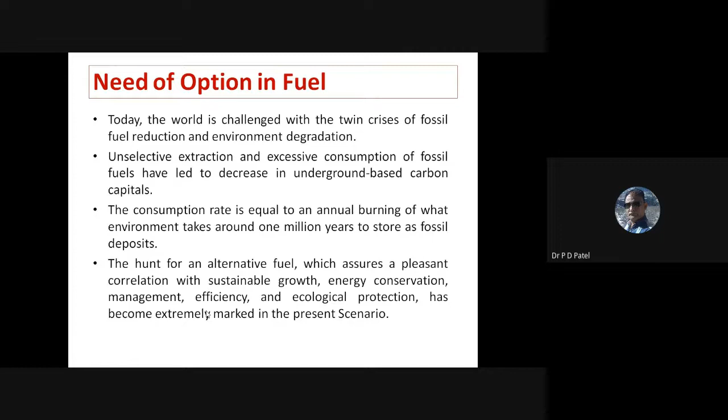This should not be too costly. I agree that alternative fuel always promotes better results in the exhaust, but it should not be too costly, which are not bearable for the general people. Now, this is the work going on with alternative fuel.

Generally, we have read the literature, and as Professor Tipse said yesterday, there is gaseous fuel and liquid fuel. These are the few fuels on which ample research work is going on. But even though that is a fact, it is true that we have not established the potentiality of alternative fuel in our transportation up to the mark.

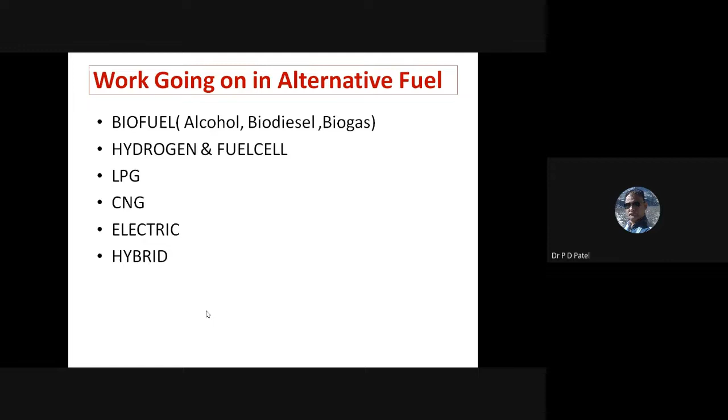In few areas, biodiesel has been used, but even though, we have not established the potentiality of alternative fuel in our country. We have used LPG, we have used CNG, it is well established, but electric vehicles, government has been promoting with some subsidies etc. But even though, we are not up to the mark where we can reduce emissions and environment pollution, and achieve a better performance in the engine.

Feasibility for the optional fuel. We are talking about the optional fuel, alternative fuel. So what are the feasibilities? Availability and renewability, emission effect on the environment and health, economy or cost, fuel characteristics, adaptability to the existing engine, safety, and infrastructure.

Why did I keep this part in our presentation? I feel that whenever you introduce any fuel, you are checking it as an optional fuel, whether it is a CI engine, SI engine, any internal combustion engine for transportation. So we have to assess and check the feasibility of all these parts first, and then we can use this fuel for the long run test. Otherwise, there may be some problems in the future.

For the short run test, there is no issue. I always say that the oil with which a lamp burns, an engine can also run on, but it doesn't mean that we should run an engine on that oil. We have to check all these parts, and then we can introduce this fuel as an optional fuel.

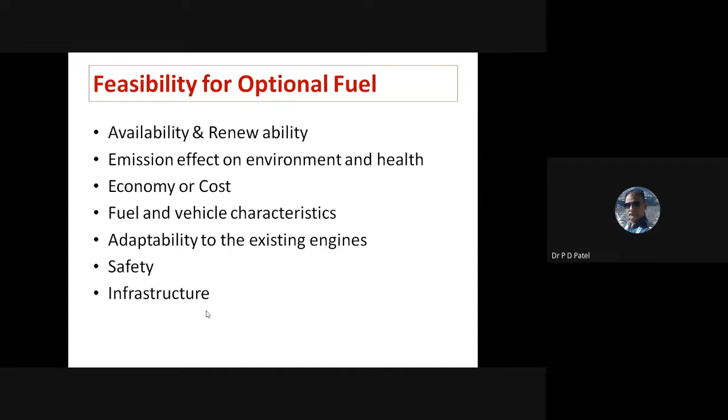So for that, till date, normally what we are measuring to establish the alternative fuel with fossil fuel is by observing the properties of the optional fuel, performance of the vehicle, and emissions of the vehicle. Most of the fuels are less damaging to the environment, as we are all aware. By using alternative fuels rather than fossil fuels, we get better results in emissions. But as far as performance is concerned, I have reviewed so many articles, and we are not achieving performance up to the mark. However, the technical feasibility is no longer questioned.

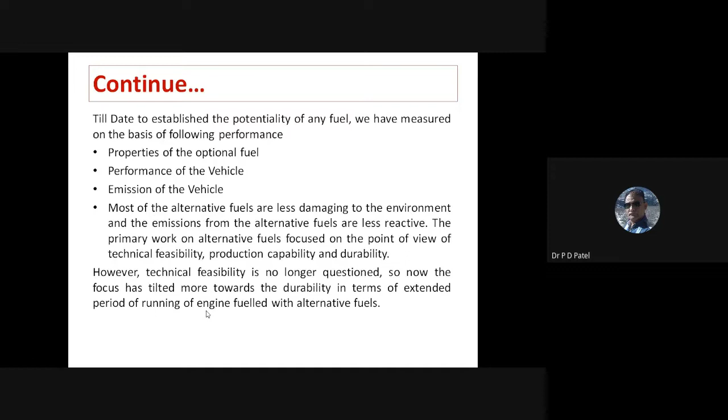But now the focus has tilted towards the durability test, to extend the period of running of the engine on alternative fuel. So we have to check the durability analysis to establish that fuel, any fuel. I'm not talking about biofuel specifically, or hydrogen fuel, or electric fuel. Whatever fuel you use, if you want to establish the potentiality of alternative fuel with fossil fuel, at least we have to check the durability test with that alternative fuel. For that, life cycle analysis is introduced.

Now, life cycle analysis, generally we call it LCA. Life cycle analysis means it is a long run test. We can say it is a long run test. Some reviewers call it an endurance test, a tribological analysis, a durability test. Any terminology you can use, but how the LCA has been carried out, how we can implement this life cycle analysis in our transportation sectors - if I say, it is basically a process-based analysis, an experiment-based analysis.

Now, process-based analysis: we have to examine the environmental aspects and product aspects at all stages throughout the life of the component, throughout the life of the system.

I'll give you the best example for process-based analysis. Normally most colleges participate in SAE Baja competition. This year my institute participated. We designed an all-terrain vehicle, manufactured it on our own campus, and participated in Indore at the event.

Next year, when we participate for the second time, we disassemble the whole all-terrain vehicle. Components which are still usable, we reuse. Those which require fine-tuning, we tune up. Those not in usable condition, we scrap. This is what process-based analysis means.

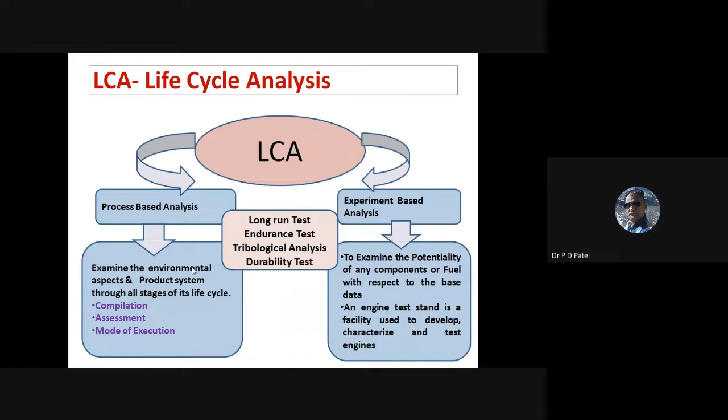Now, experiment-based analysis: we have to examine the potentiality of any component or fuel with respect to base data, with respect to the fossil fuel which we are using in IC engines. This engine test stand is a facility used to develop, characterize and test engines.

Going through the process further, the SAE Baja competition is just a basic example to understand what happens. We manufacture a component or product, distribute it, use it, and after the defined age based on performance or application, we scrap that equipment or vehicle. This is what we call end of life.

During that part, we determine which components can be used and which can be recycled. We disassemble it, the material goes through the manufacturing plant, and then it is used again for the product. This is the whole cycle we follow - the life cycle from the process point of view.

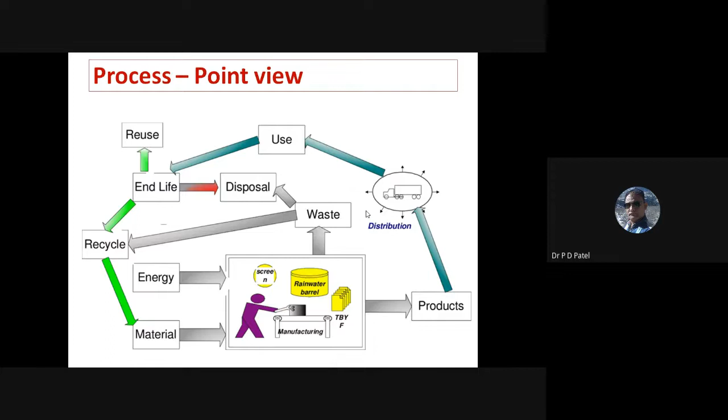As far as performance and experiment is concerned, we move with the experiment point of view. Friends, this is from my experience since 2011. I'm sharing today my whole experience of life cycle analysis during my research.

In the experimental point of view, for any engine used for transportation, we have to find out the performance analysis. Secondly, we check the impact of addition of oxygenated fuel. We also check whether any engine parameter influences performance and emission. This is all one part of this.

Ample work has been done in this portion. I've seen so many articles - if I search on biodiesel in Science Direct or elsewhere, I'll get hundreds of papers. But the fact is, we have not established biodiesel in a full-fledged way in our country. So there is some problem, and we have to find out why we are lagging.

If I move to life cycle durability analysis, there are two components which have to be checked: the rate of wear that occurs in the engine components, and the impact of the lubricating oil. This can be done through qualitative analysis and quantitative analysis.

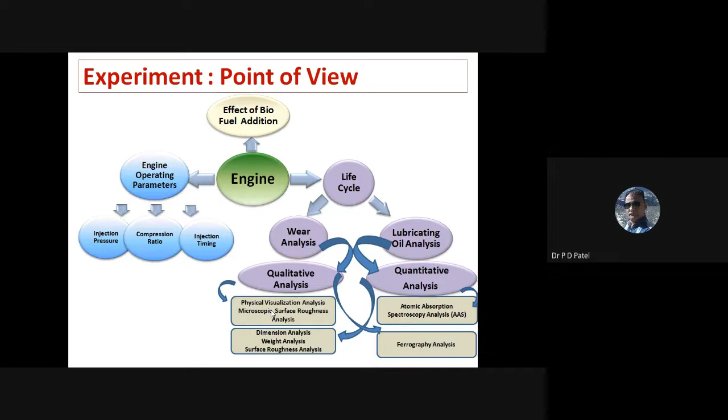But it's not always possible that I'll get better results. If someone changes the oil, he may get better results compared with this experiment.

From the experiment point of view, if you see the background, the Pollution Control Board suggests that if I talk about the effect of emissions only from the transportation sector, 80% emission is emitted in the environment by road transportation. Very few, 13, 7 and 1 percent, is by rail, sea and air. So now we have to think how we can reduce this emission in the environment caused by road transportation.

So what do we have to think about? If you see vehicular pollution control, a question occurs in my mind: what have we done till date, what actions? Government has some regulations and policies to establish biofuel as an alternative fuel. The fact is, again, we have not established biodiesel with the main fuel. There is a lot of work done, no doubt, friends, but we have not established this fuel with the mainstream. What have we achieved till date?

So there is a lot of work going on to establish this optional fuel in CI engines and SI engines. If I talk about Gujarat, to minimize pollution in Ahmedabad, government is introducing the bus rapid transit system, a public transport system. This is one parameter — we have to develop a public transport system in a way that everybody can get it and everybody can use it.

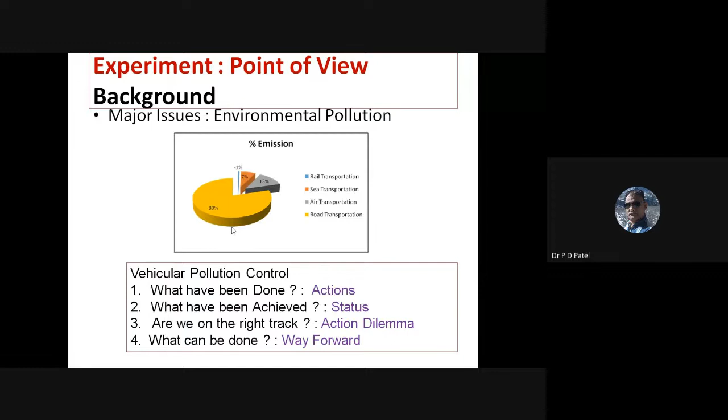Technological intervention is required to minimize these pollutions. We have to improve fuel qualities, and to do so we are using CNG as an optional fuel. There are progressive emission norms, with improvement in Bharat Stage 4 and 6. As an alternative cleaner fuel, CNG is almost a zero emission option.

As I said, there's improvement in the public transport system in Gujarat — so many cities are introducing this bus rapid transit system, BRTS. It has a special corridor; government has made a special corridor for public transport so there are no obstacles and no traffic issues. In Gujarat, there are so many cities introducing this bus rapid transit system.

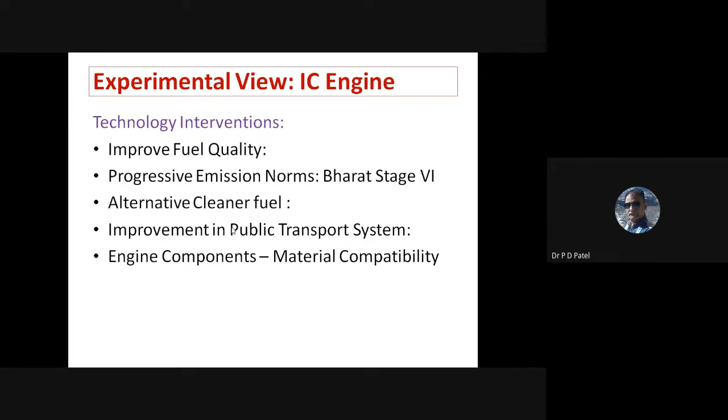Lastly, engine components and material compatibility have to be verified. Keeping all this in mind, I started this case study for life cycle analysis in 2011. At that time, I was not sure which fuel I would use, or which one would have more impact in the combustion area, performance area, and emission area. But I started with biofuel.

It is a non-edible oil, and literature suggests using biodiesel concentration up to 30%, so I restricted myself to 30%. Now, regarding the addition of additives as an oxygenated fuel, I'll let you know why we are using additives — I'll show you in the graph later on.

So what happens during my performance, and literature supports it: in biodiesel, we are all aware that performance is almost the same. Brake thermal efficiency, fuel consumption, these are all almost the same. But as far as emission is concerned, hydrocarbons, carbon monoxide, carbon dioxide, that is okay. It's fine that they are reduced up to the mark, but NOx emission is increased.

And this is why it happens: in biodiesel, the oxygen content is 11% by weight. And in the environment there is nitrogen gas, so during combustion, oxides of nitrogen increase. Again, it has a correlation with the exhaust gas temperature, so definitely it will increase. But how can we minimize that part? Because we have to work with our Bharat Stage norms. We have to keep in mind the Euro norms, Euro 4 norms.

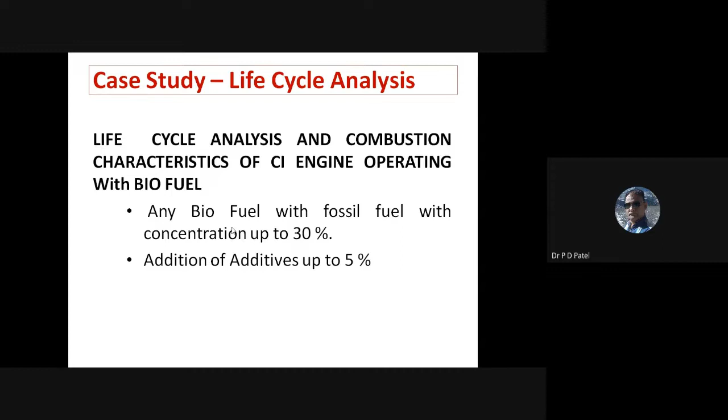In the life cycle of any automobile with biofuel, we normally carry out these 4 analyses: property analysis, performance analysis of the CI engine with biofuel or alternative fuel, engine parameter analysis, and long run analysis. Now this long run, D component, is a key part of this presentation. Ample work is done on A, B and C. But what we have to do in the D part, we'll see today.

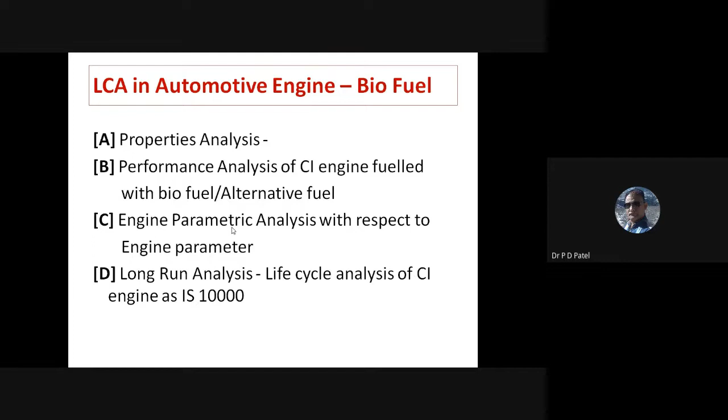Basically, I've reviewed many articles, PhD theses, MTech theses, and I found that 80% of people doing research in alternative fuel are specifically in biodiesel. And in biodiesel, they say, I have used karanja oil, jatropha oil, rapeseed oil, cottonseed oil, any oil. I'm talking about esterified oil. They use esterified oil, measure the performance and the emission with a 5-gas or 4-gas analyzer, and conclude that, yes, emission is reduced. But is it sufficient?

Because throughout the country, from north to south, the environmental conditions are different. If I do the performance in the north, Kashmir, Uttarakhand, Himachal, and if I do the research in the eastern or southern portion, I will get different values. So first of all, I suggest that during performance analysis we should follow the IS 10000 standard, and carry out the performance on that basis. Because this standard considers the site condition and standard temperature and pressure.

So on the basis of that site condition, we have to calculate the correction factor and apply it to these three: correction factor for engine power, correction factor for brake specific fuel consumption, and correction factor for thermal efficiency. Then we can conclude that, in any part, we will get the performance analysis in this respect.

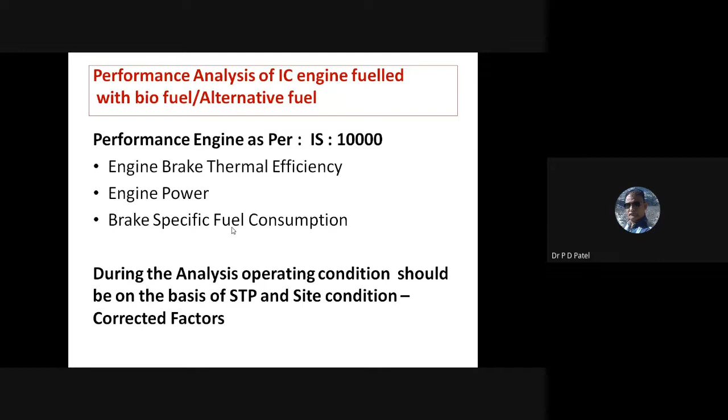Here, during my analysis, initially, as I said, we selected the test fuel, we selected the additives, and we prepared the blend. This third component, preparation of the blend with diesel fuel, is the most important portion for the analysis of properties and performance. When you add anything to diesel fuel, whether biodiesel or an oxygenated fuel like diethyl ether or dimethyl ether, it will vaporize.

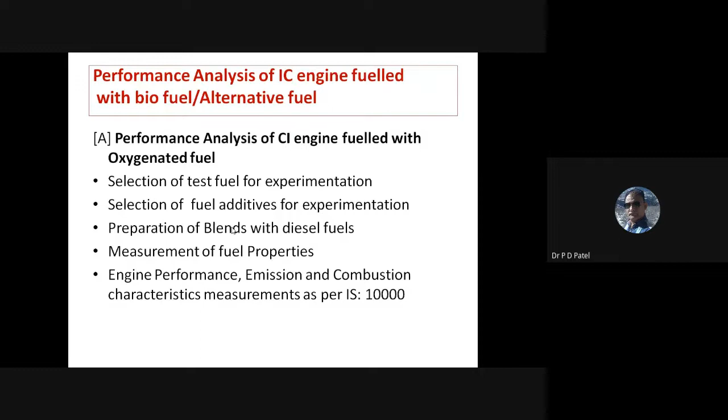So you should handle it in such a way that you immediately check the properties and immediately use it for the performance. You should not keep it for a day and then use it; you will not get a better result. This is what we have observed. And to establish that, we checked the results statistically a number of times and then concluded. It should be properly blended. Then the measurement of fuel properties, engine performance and combustion characteristics is as per IS 10000.

Now the selection part. After selection, we have selected diesel as a base fuel, biodiesel derived from non-edible oil as biofuel, and bioadditives, that is diethyl ether. Again, there is a question: why use diethyl ether? There may be a possibility that you can use dimethyl ether. There are 3-4 additives available. You can replace the diethyl ether and further go ahead with this analysis. You will get some better results.

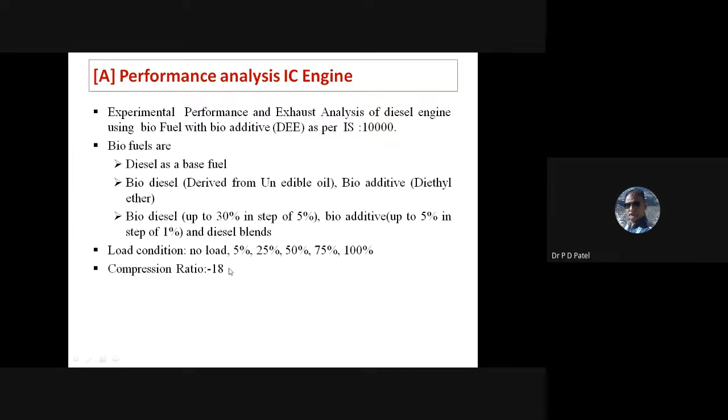There may be possibilities. But biodiesel is up to 30% in steps of 5%, bioadditives up to 5% in steps of 1%, and diesel blends. The load conditions we kept in mind are initially no load, then partial load condition, then 50% load, 75% load, and 100% load. Compression ratio we have not changed yet. In the further study we changed it, but here, as the manufacturer suggests, we kept the compression ratio 18, and we went further for the analysis.

Then the measurement of properties. Here in measurement of properties, we have checked so many properties, but two key properties, that is density and calorific value. For density, we have used the ASTM standard, and a bomb calorimeter has been used with the standard ASTM D240. These are well-defined standards we have used, and then we calculated the density and calorific value.

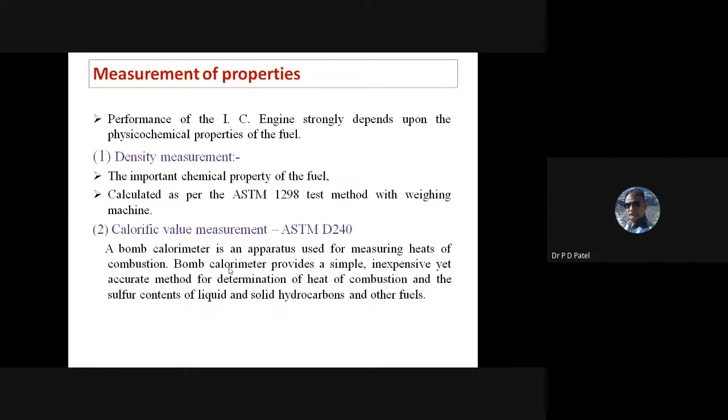But keep in mind that initially we measured the properties for diesel and biodiesel. We were not achieving it, so we added the additives, and then we measured these properties with diesel, biodiesel, and oxygenated additives. The properties we received are really impressive. This is the percentage, the concentration of biodiesel used. This point is 100% biodiesel, this point is 100% diesel, this is the density, and this is the calorific value in megajoule per kg.

As the concentration of biodiesel gradually increases, the density of this fuel increases gradually. In the same way, the calorific value is reduced gradually. At 100% there is a drastic change. That's why we are not using 100% biodiesel in a CI engine. There is a drastic change of calorific value between 100% diesel and 100% biodiesel.

After addition of diethyl ether, what we observe is at almost 20%, the calorific value is nearer to the diesel value. So we kept in mind that we can use blends up to 20%. The calorific values of biodiesel and diethyl ether are 12% and 30% lower than conventional fuel respectively. The density of biodiesel is 7% higher, while diethyl ether is 14% lower than conventional diesel.

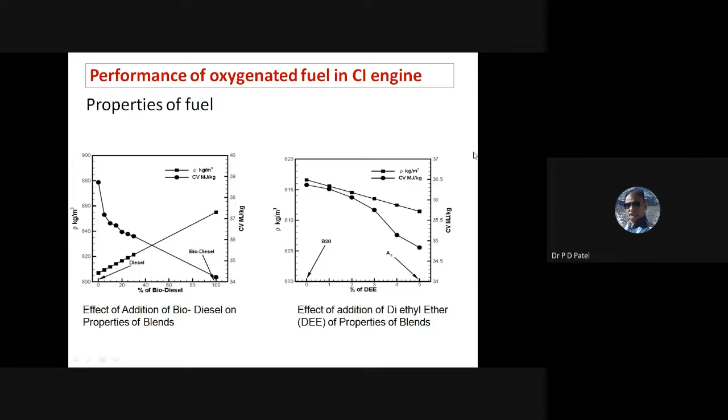Hence, for the same performance, the engine will consume more fuel when fueled with biodiesel blends compared to diesel. Moreover, biodiesel and diethyl ether have a higher cetane number and oxygen content compared to diesel, which may lead to better combustion in the engine. That's why we started our experiment with the hypothesis that we will achieve better combustion using this oxygenated fuel, and we went further for the performance.

This is a variable compression ratio test rig where we can change the compression ratio, the injection timing, and the injection pressure. We used a variable compression ratio test rig for the CI engine. These are the different temperatures observed throughout the experimentation: T1, inlet water temperature, outlet water temperature, inlet calorimeter temperature, outlet calorimeter temperature, all in degrees centigrade, and exhaust gas temperature before and after the calorimeter.

This exhaust gas temperature has a correlation with your NOx. So we observed all these temperatures throughout the experiment. It is a tedious process, I'll let you know.

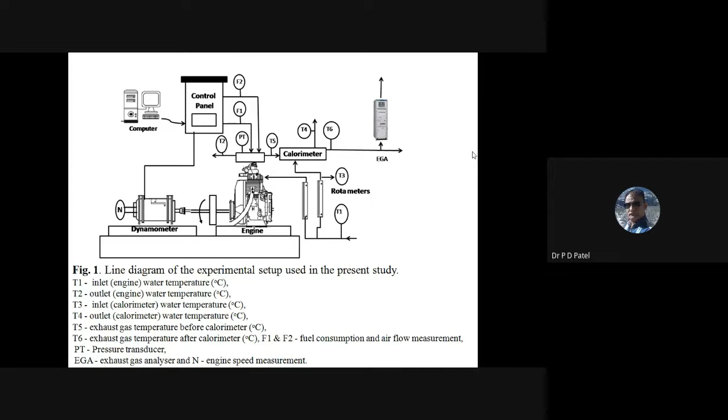Monitoring is required. I'll talk about the performance of biodiesel on the engine; still I am not talking about the additives. It is on the basis of performance. I have not used additives till now. So for performance, these are the different blends we prepared: B5, that is a blend of 5% biodiesel, 10%, 15%, 20%, 25%, and 30%.

So biodiesel has a low calorific value and high density as compared to diesel. As I said earlier, at the same time, biodiesel contains 11% oxygen by weight. Due to the lower calorific value, the actual fuel consumption, this is mf, is found to be higher with all blends as compared to diesel fuel, although it is increased marginally, not to a remarkable extent.

When we observe the brake specific fuel consumption in kg per kilowatt hour, brake specific energy consumption and brake thermal efficiency, it is observed that as the concentration of biodiesel is increased, BSFC and BSEC are increased, while brake thermal efficiency is marginally decreased. This observation has been done almost at full load conditions.

So again we have observed that this may be due to the fact that the heating value of diesel-biodiesel blends is lower, so more fuel is required to produce the same amount of energy. That's why it may be reduced marginally. But the variation in brake thermal efficiency is marginal due to the complete combustion achieved in the presence of oxygen, as biodiesel has a higher oxygen content.

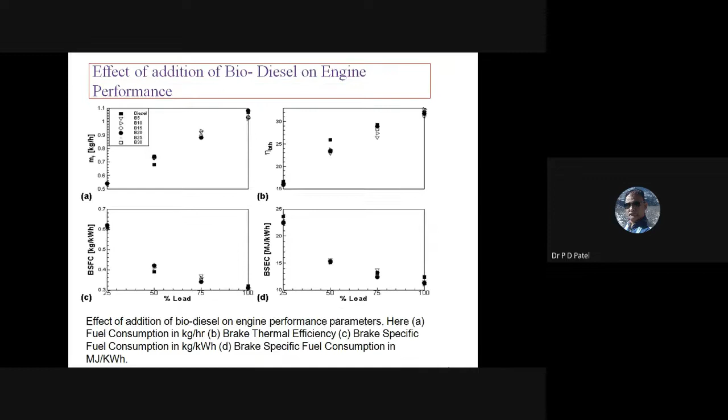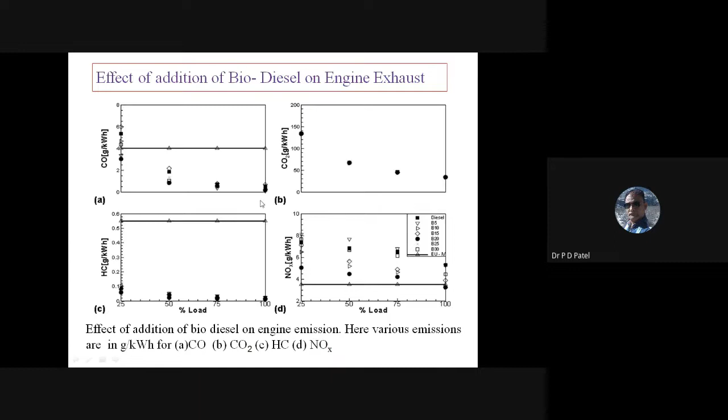If someone says that in the part load condition the emission is always higher, it is obvious that it is higher because the fuel-air ratio is very lean, leading to incomplete combustion. During part load, the emission is always higher. But the observation should be made at full load, during the dynamic condition. So at full load, all the emissions have been controlled. They are reduced.

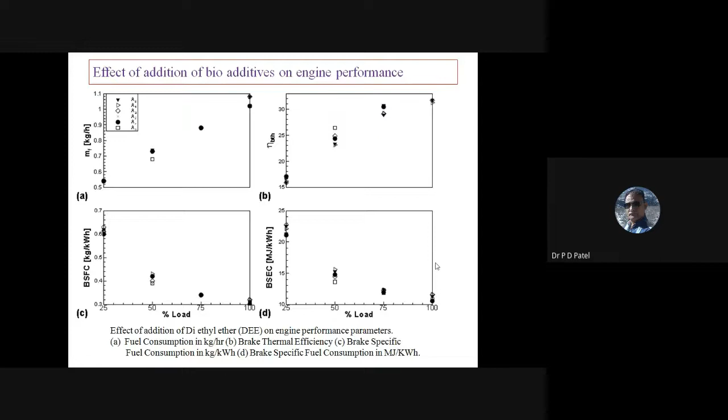Friends, as I said, by use of oxygenated fuel bioadditives, we achieved good results in form of performance as well as in form of emissions. Here in emissions, specifically, if I talk about the exhaust part, by use of this one, we achieved this emission. It is with respect to the Euro norms.

So the effect of diethyl ether on emission, specifically on the oxides of nitrogen: as the cetane number of diethyl ether is quite higher than the B20 blend, it exhibits a shorter delay period and results in better combustion. Therefore, it is envisaged that the higher oxygen content and cetane number of the blend may lead to a lower NOx emission. With 4% of diethyl ether, NOx emission was found to be reduced up to 25% during our experimentation. That's why we have used this 4% bioadditive.

We further decided that we will move with the addition of 4% bioadditives in 20% blend with the fossil fuel, and we will carry out our life cycle analysis on the base of that part only. So it is really interesting that if we had not achieved this NOx emission with diethyl ether, then maybe we would have to replace our bioadditives and go further for the experimentation. But here we achieved it, so we move further with 4% of additives, 20% of biodiesel, and 76% of fossil fuel.

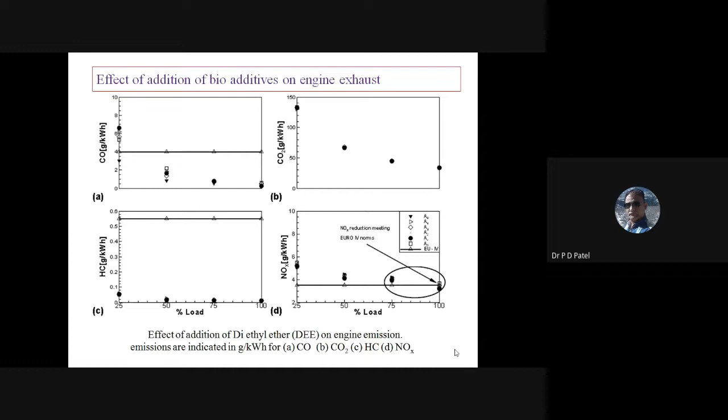Again, if you see the combustion characteristics, friend, I have demonstrated these 4 parts, that is the P theta diagram, the net heat release pattern, the delay period with maximum pressure and rate of pressure, and theta pressure maximum. So maximum pressure is found to be increased with the gradual addition of diethyl ether, although the variation is marginal. If you see, this is 0% additives, this is a B20 blend, 1% additives, 2, 3, 4, 5% of additives. So it is a marginal variation.

This may be due to the enrichment in premix combustion, as the peak pressure may depend on the combustion rate in the initial stage. So it is marginal because of the enrichment in the premix combustion. But interesting is that by addition of diethyl ether, the peak pressure is achieved nearer to TDC. It was examined with the 20% blend: it was observed at 11 degrees after top dead center, while with the addition of 4% diethyl ether it is nearer to TDC, that is 9.5 degrees.

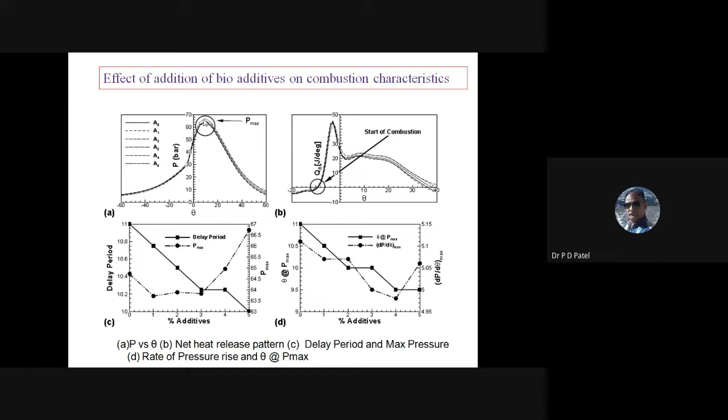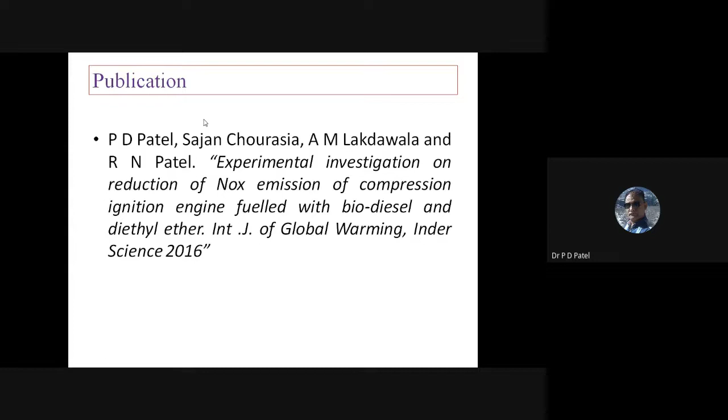So we feel that it is a good symbol for better, normal combustion. So again, this bioadditive supports better combustion in a CI engine. On the basis of this part, we have published one article, an experimental investigation on reduction of NOx emission of a compression ignition engine fueled with biodiesel and diethyl ether. It is in the International Journal of Global Warming, 2016. It is available on open sources.

Now, the first portion of this work has been done by so many fellows, there is no doubt. Now the second portion: the engine manufacturer has given some configuration, that this injection pressure, injection timing, and compression ratio are good for this fossil fuel diesel engine. Now we are replacing this fuel. So we have to assess, we have to play with some engine parameters, change the configuration of engine parameters, and then examine. On that objective, we go for the study with engine parameter analysis with respect to engine performance.

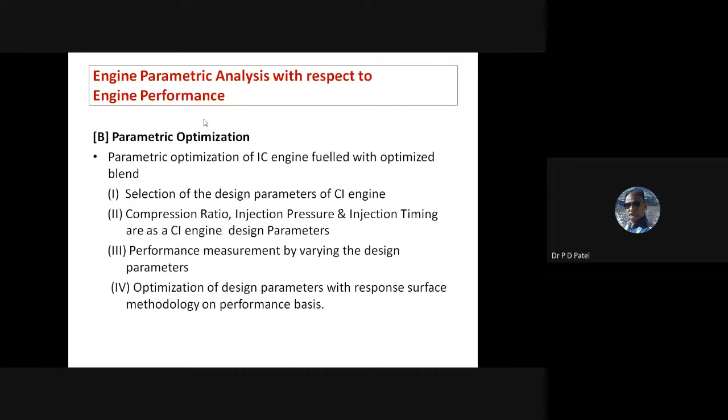Initially, we identified this 20% biodiesel, 4% additives, and 76% diesel fossil fuel. But by changing the engine parameters, are we achieving better results? With that objective, we carried out this parametric optimization. In parametric optimization, keep in mind a number of parameters are available. Our response is performance: brake thermal efficiency, brake power, brake specific fuel consumption. In this engine, I have used 3 engine parameters, that is injection pressure, compression ratio, injection timing.

But again, there are a number of other parameters we can use for more research: nozzle tip, nozzle spray angle, spray pattern, blend ratio, jacket temperature, inlet temperature, engine load, spray holes, diameter of the spray holes. Two students are doing research under me with these nozzle spray holes and nozzle spray angles. By changing the nozzle spray angles, are we achieving more results with the biofuel, or promoting better combustion? So we are studying that part.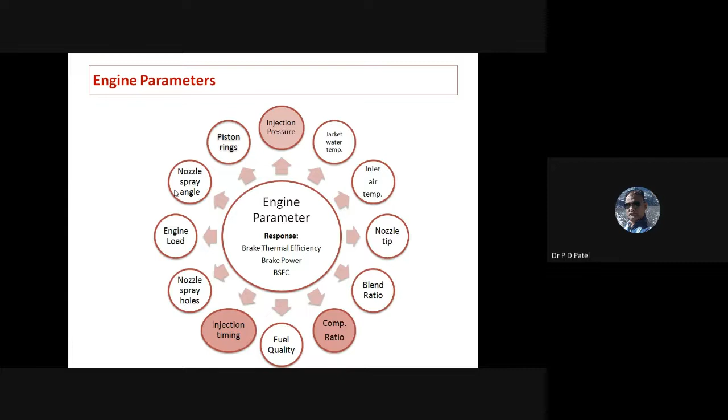But here we have taken injection pressure, compression ratio, and injection timing. These are the 3 different parameters we have used, and by use of these 3 parameters, we have optimized. We have used the response surface method as a technique, with brake thermal efficiency as the response, and the input parameters are compression ratio, injection timing, and injection pressure.

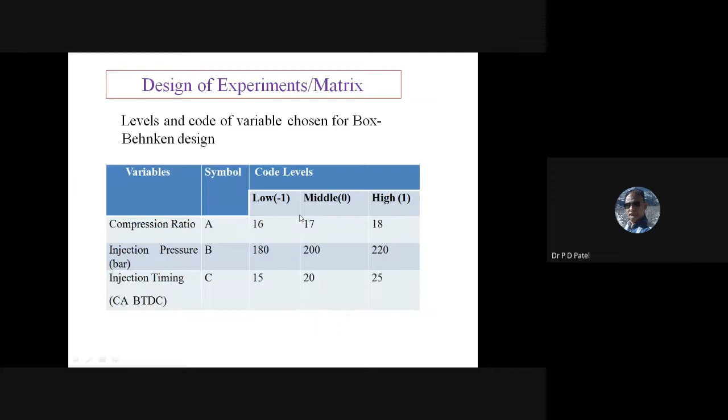And with that aspect, we have prepared the test matrix. This portion has been completed. If you see this plan, the supplementary fuel, that is B5, B10, B15, B20, B25, B30. The concentration of bioadditives is 1%, 2%, 3%, 4%, 5%. The engine load condition from part load to full load condition. To get the statistical analysis, we have performed the experiment 3 times. So total reading for one particular blend of B5 with 0 additives, 15 readings. And on the base of that, we optimized one blend, that is B20 biodiesel, 4% additives and 76% fossil fuel.

Now with this further study, that is parametric optimization, 16, 17, 18 compression ratio, 20 degree before TDC, 25 degree before TDC, with these 3 different values of injection pressure. So we have prepared a design of experiment with respect to the response surface method, and we have to conclude one configuration. The blend is optimized. Now the engine parameter has to be optimized. And then on the optimized engine parameter, we have to perform the life cycle analysis.

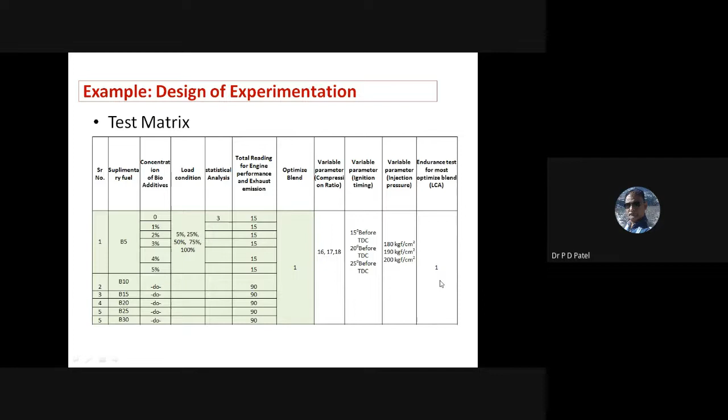So with the response surface method, if you see the interactive effect of compression ratio, injection pressure and injection timing. Here if you see this first plot, that is brake thermal efficiency, injection pressure and compression ratio. If we increase the compression ratio gradually, and if we increase the injection pressure gradually, the brake thermal efficiency is gradually increased both ways. This is because the high pressure promotes normal combustion, so it promotes better brake thermal efficiency.

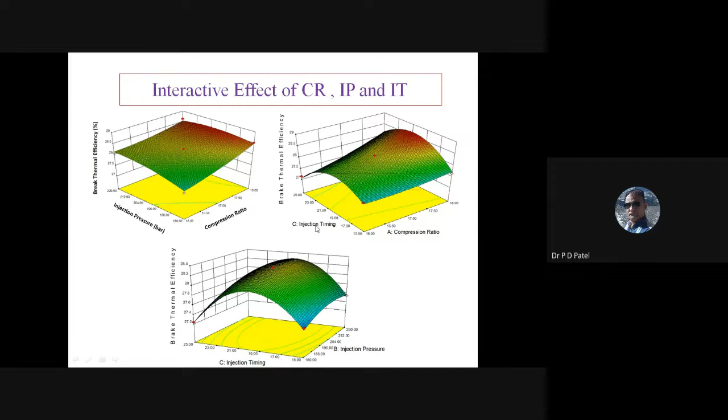But at the same time, we are not achieving that with gradual increase of injection timing. The brake thermal efficiency is gradually increased, but at some point it then starts to reduce. So you can say that advancement of compression ratio and injection pressure is a healthy condition for the engine, but excessive advancement of injection timing is not a healthy condition for this combustion engine. So on that base, we optimized the range: 18 compression ratio, 220 injection pressure and 20 injection timing before TDC. With this, the predicted value given by the response surface method software is 28% brake thermal efficiency, and the experimental value is this.

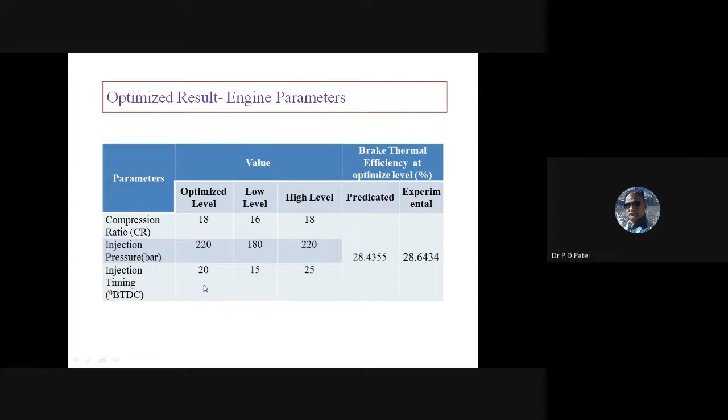So we have carried out the long-term analysis with the optimized blend and optimized engine parameter. And as I said, this part has been published in Taylor and Francis in the Biofuels journal, that is Box-Behnken-based response surface methodology for optimization of operational parameters of compression ignition engine fuelled with blend of diesel, biodiesel and diethyl ether. Again, it is available open source.

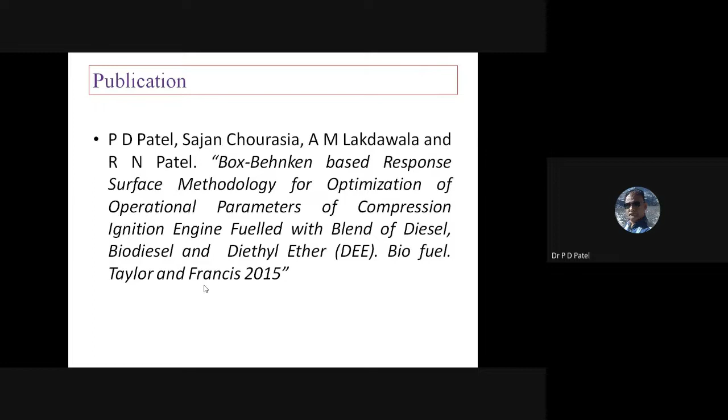Now the key part, that is the life cycle analysis of CI engine using optimized blend. So more focus on wear and tear. We have to identify the rate of wear by use of this fuel, whether it is in the positive way or the negative way. Performance we get the positive way, emission we get the positive way, combustion supports that, yes, we can go ahead with this. So with that objective, we did further life cycle analysis.

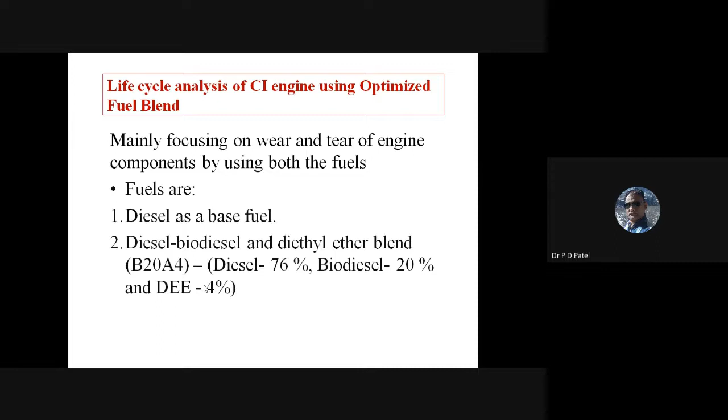Now diesel fuel, as I said, this is 76, 20 and 4% additives. This is my blend, this is my optimized parameter. And then we started our life cycle analysis. Now life cycle analysis, I'll tell you first, it has a few stages. First stage is we have to go with the preliminary test.

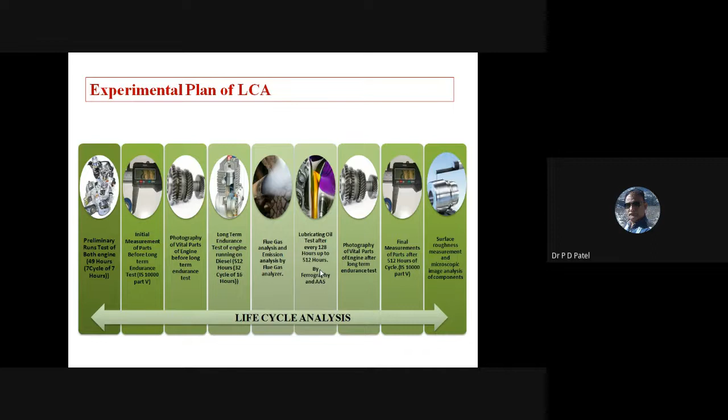Now, how this preliminary test and long run test has to be taken. For the preliminary test, it's not that I just started the engine and it runs on any load. There is a specific load condition defined in standards. Initially, 25% load for 1.5 hours.

This portion is the preliminary run, for 7 hours, over 7 days, 49 hours exercise. So 25% load for 1.5 hours, then 50% half load condition for 2 hours, then 75% load for 1.5 hours, and 100% load for 2 hours. This is the bifurcation for 7 hours.

We have to run the engine with these aspects and constantly monitor it. For the actual load condition, when you run it for 512 hours, every day I have to run the engine for 16 hours. This is the bifurcation of 16 hours.

Initially for the warm-up condition, 4 hours with full load condition, then 110 load condition for 1 hour for overload condition, then half hour for idling, no load condition, again full load condition, again 3.5 hours with half load condition. With this loading condition, we have to run the engine for 32 days. Both engines have to be run for 32 days.

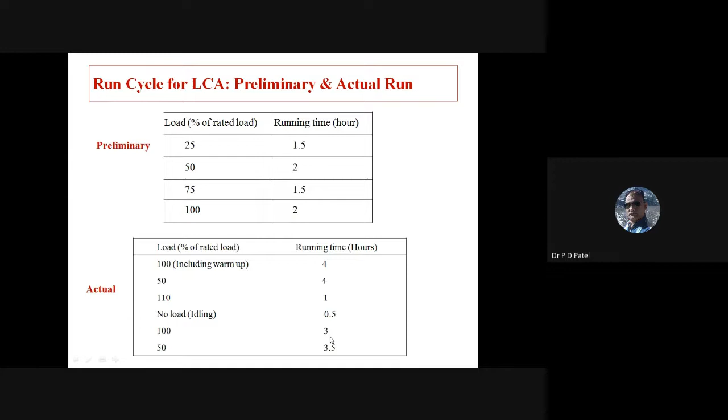This is now elementary analysis. Now elementary analysis, this basically explains why this need of life cycle analysis is required.

The main need for the life cycle analysis of CI engine is that the combustion associated property of plant oil is slightly like mineral diesel, but pure plant oil mixed with diesel may create long lasting problems in the CI engine. Such difficulties should not arise if I go with a short run analysis. That's why this long run analysis is required to assess it.

So for that, we carried out elementary analysis, component elementary analysis, because I should know in which component wear occurs, and from which component the abrasive metal collected in the oil sump is worn. That's why the elementary analysis has been carried out.

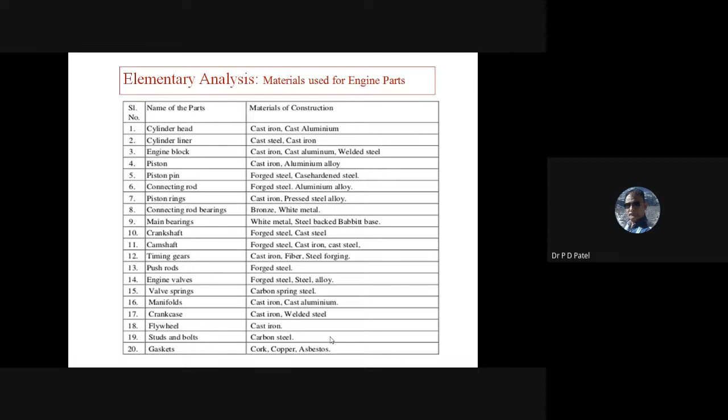The main objective of the elementary analysis is to identify the composition of the various metals present in the particular engine component. This analysis can serve as a guideline to identify the wear of various components at a later stage. As I said, in the present work, the elementary analysis is carried out for the long run test.

Now, this table shows the elementary analysis, and it shows the different elements present in the engine component, such as manganese, chromium, nickel, ferrous, copper, zinc, magnesium, cobalt, lead, aluminum. So the presence of these components in the engine component has been examined.

So here, this component elementary analysis - to carry this out, we prepared a slide. We purchased these engine components, cut the engine component slightly, and tested those engine components. On that basis, we received data showing that this chromium is present in this percentage.

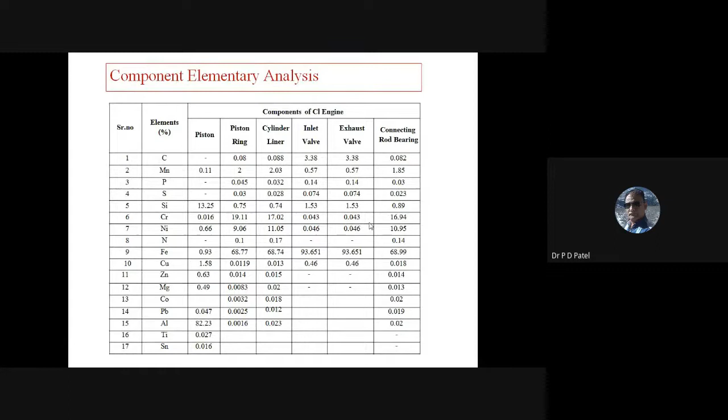After the elementary analysis, now we are aware that this element is present in this component. So then after we carried out initial wear analysis, weight and dimension.

As I said earlier, weight analysis has been measured in the weighing machine at our institution, and dimension analysis has been carried out on the coordinate measuring machine at Central Institute of Plastics Engineering and Technology, CIPET, Ahmedabad.

So here in the weight analysis, before the endurance test, if I talk about this component, this is the piston assembly, initially it is 669.278 grams, but after the endurance test what we achieved is that it is slightly decreased. If I compare with this one, it is slightly decreased, but the decrement in B20A4 is not that much compared with diesel, it is somewhat lower.

So we can say that yes, the rate of wear in biodiesel is less compared with diesel. And again, if I talk about it in terms of percentage, it is 7.1% lower compared to the diesel fuel.

Again, there are two dimensions that we have measured, with respect to the diameter, with respect to the X-axis and with respect to the Y-axis for the piston assembly. And again we observe that there is 52.7% reduction. This is lower wear in B20A4. This is the initial part of the life cycle.

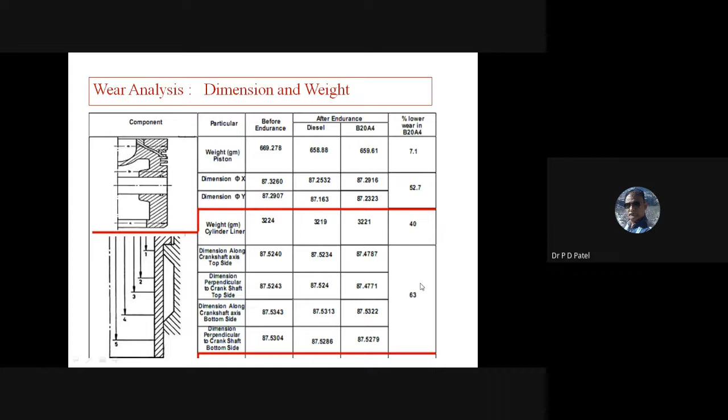So this is all parts we observed, then we took care of the dimension and weight, and we observe that again this supports that the wear in biodiesel with oxygenated fuel is less compared with diesel fuel.

Friends, again, if you see, this is a connecting rod geometry. In connecting rod geometry, there are two diameters with respect to C and D, with respect to two different directions, X and Y axis. We observed, we found it - again there is support that this reduction, this excessive reduction that we achieved in connecting rod, is with respect to diesel versus biodiesel.

This is what, in this wall geometry, in piston ring geometry - this is a piston ring, that is radial wall thickness, this is the radial wall thickness. This is the ring gap, and this is the edge. It shows that this is the actual width. So there are three parts.

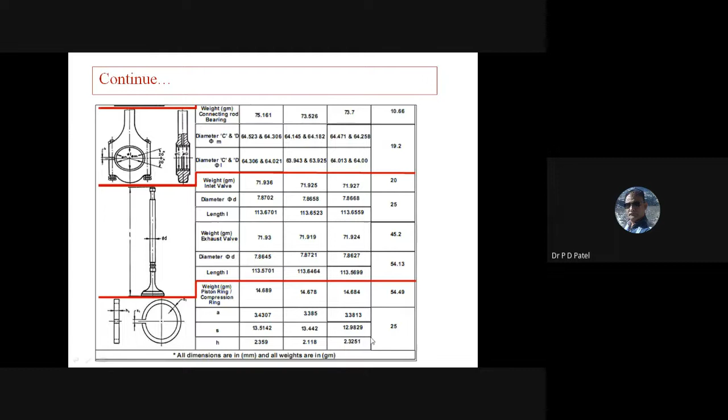The important part is this gap - this is radial thickness and axial thickness. This is what we observe, that again on the weight and dimension analysis, it is supportive that the wear occurred in diesel is more compared with biodiesel. So this is one part that we have concluded, that on the basis of dimension and wear, the percentage of wear is higher in diesel compared with biodiesel.

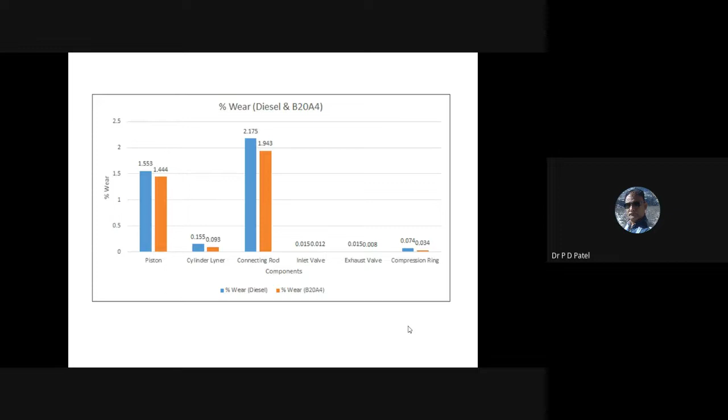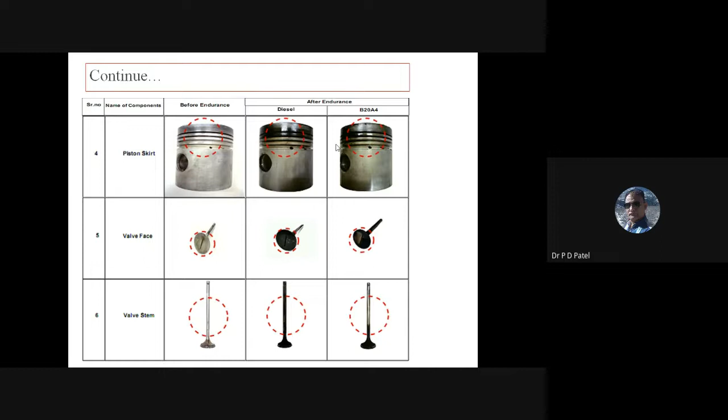So on that part we say that there is abnormal combustion; possibilities of abnormal combustion are there in this cylinder head. Same way for the piston, same way for the piston skirt. The piston skirt is highly rubbed when we disassembled this portion. But in B20A4, the condition of the piston skirt, compared with diesel, is fine. Sorry, same way for the valve face, valve seat, and valve stem.

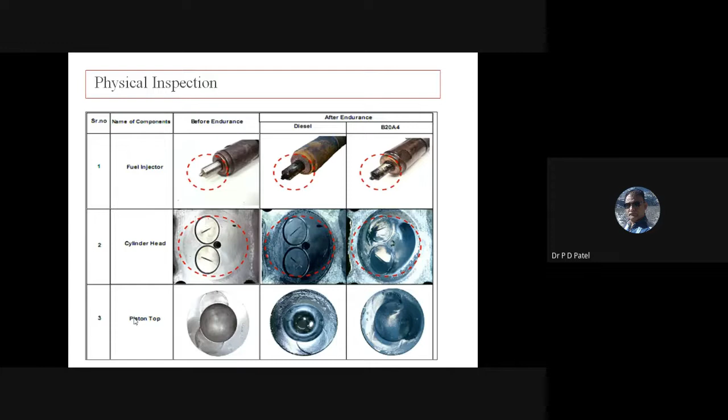Now, the second portion, as I said, on the basis of dimension, weight, and physical inspection, again I say that this wear is less compared with the fossil fuel. Now the fourth portion that we carried out is the surface roughness and microscopic close image analysis. It is a qualitative analysis.

So here, initially we identified the point on the piston top, the nozzle tip, and the inlet valve. On that particular point, we carried out the microscopic image before and after endurance, and roughness values before and after endurance, at 50 and 1000 magnification. For this point, at 50 and 1000 magnification, there is scrubbing on this surface, and it supports the average roughness value and the roughness Rq values.

So when you compare the diesel value with B20A4, there is a reduction in surface roughness with respect to diesel. So again it is a supportive part. The surface roughness and microscopic image analysis suggest that more wear occurred in the diesel engine compared with B20A4. The rate of wear is marginal. You will not achieve that much rate of wear, but it occurs. For the long run, 1 lakh kilometers, it will affect.

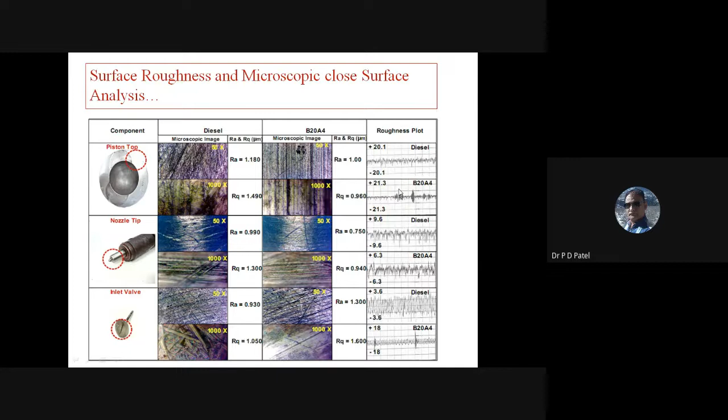Same with the roughness plot for the 8 mm length; in the diesel portion, the roughness plot says that excessive wear occurs in the diesel engine. Same way for these 4 components we carried out: exhaust valve, cylinder head, crankshaft bearing, and cylinder liner for the particular points. And on this basis, we conclude that excessive wear occurred in diesel compared with biodiesel.

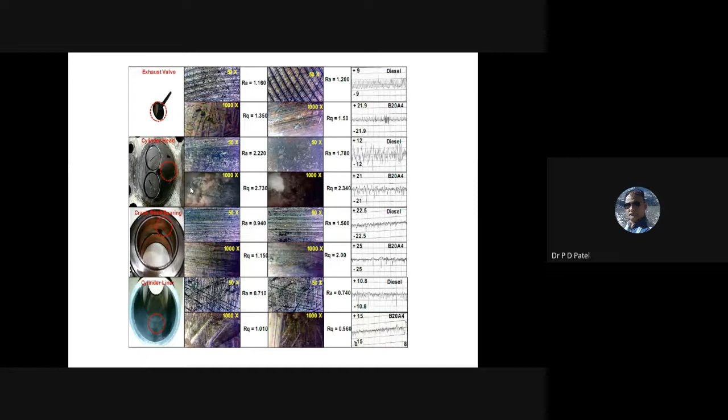Now, after this qualitative and quantitative analysis, as I said, every 128 hours we collected the lube oil sample, and on it we carried out 2 analyses: atomic absorption spectroscopy and ferrography analysis. Atomic absorption spectroscopy is generally carried out on an AAS analyzer, available in the market and in laboratories, Agilent model. It works on the principle of absorption, where atoms in the form of vapor absorb radiation energy at particular, well-defined wavelengths that provide the characteristics of a specific metal or non-metal.

So here we prepared a slide of lube oil and assessed it in atomic absorption spectroscopy. Around 10 grams of lube oil is taken and weighed in a silica crucible. Then it is burned for 4 hours at 450 degrees. This is the procedure for AAS. And then for the next 2 hours, it is at 650; the temperature is increased by 200 degrees for 2 hours.

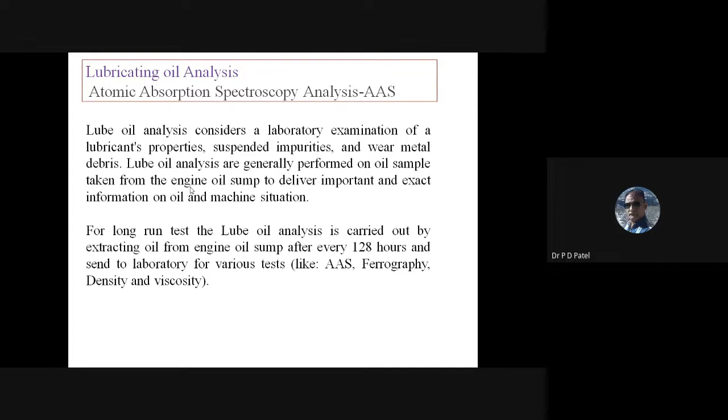And then we add concentrated HCl and the mixture is diluted. The diluted mixture is then passed through an air-acetylene flame, and the amount of radiation absorbed by the sample is used to identify the concentration of various debris metals. On the basis of that radiation, we identify which element is present in the lube oil. On that basis, we carried out atomic absorption spectroscopy. Here, these 8 metals are presented in front of you.

This is a... one minute.

These 8 metals are presented here. This is cobalt, magnesium, lead, chromium. So here again it is in ppm. We observe at particular intervals of 128 hours, and it is ppm for this particular debris metal.

So this plot shows that for the diesel and for B20A4, observing this graph, we can say that it gradually increases with the time interval, but by almost the same amount. While here in magnesium, initially for the 128 hours, it increased drastically, then it's constant. So when we compare both metals, you can say that in B20A4 the percentage of wear is comparatively low with respect to the diesel fuel.

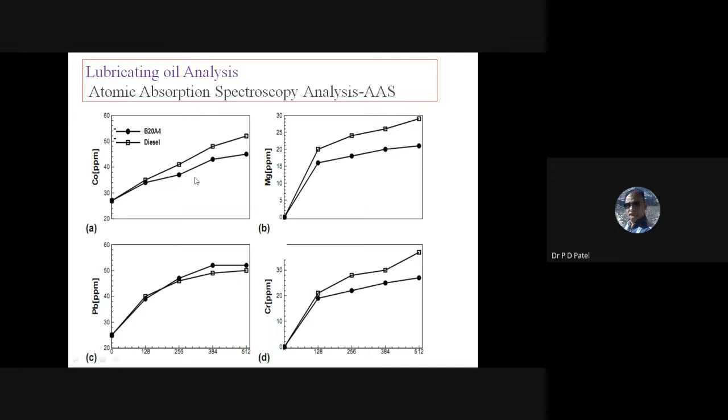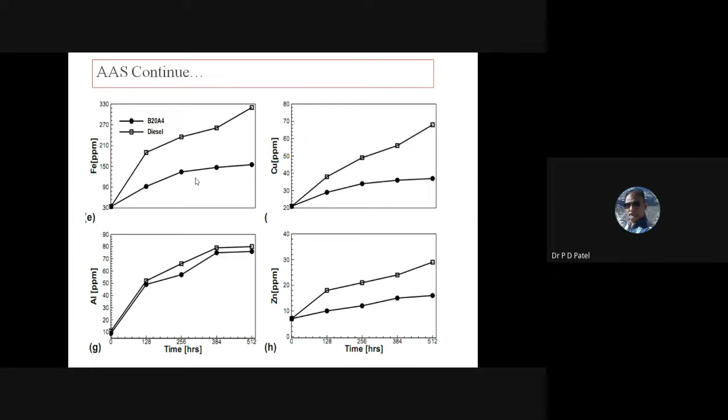Same way for ferrous, copper, zinc, and aluminum. So on this basis, we can conclude that the rate of wear is higher in diesel fuel compared with the use of B20A4. One more analysis has been carried out because we have to check the lube oil property. It plays a key role in the combustion. The lube oil property is also not deteriorating during the 512 hours at full load condition. Again, we are getting better combustion with B20A4.

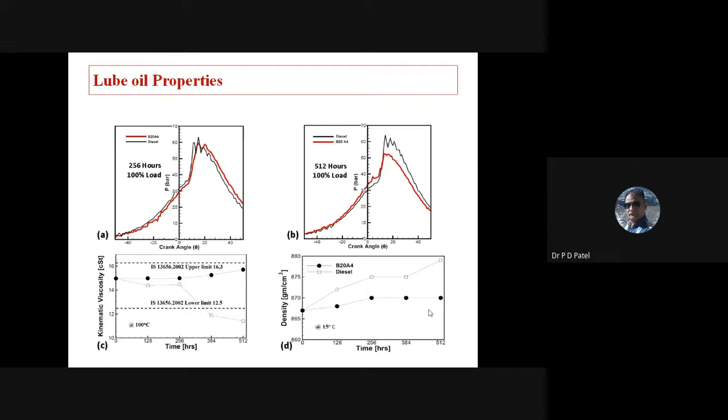We have observed the combustion properties, and the kinematic viscosity and density during the whole experimentation, and we conclude that if the lube oil property were deteriorating compared to diesel, then again we would be at zero. So the lube oil property is not deteriorating. So we further went ahead and carried out ferrography analysis. This is the last component in our experimentation.

In ferrography analysis, we searched and did not find much literature on ferrography analysis, and we have defined one process for the ferrography analysis. It is a really powerful tool to diagnose oil properties, oil analysis.

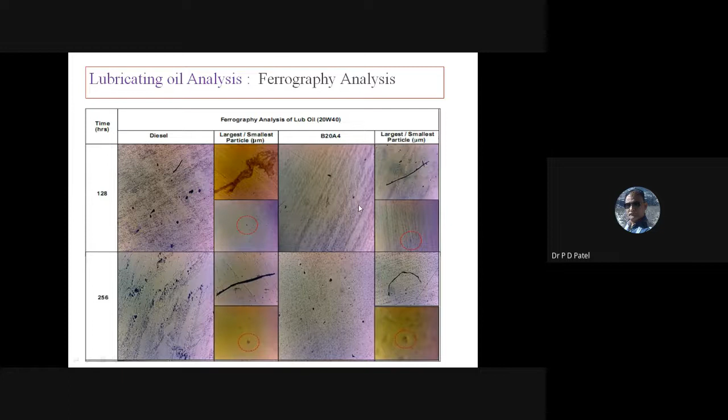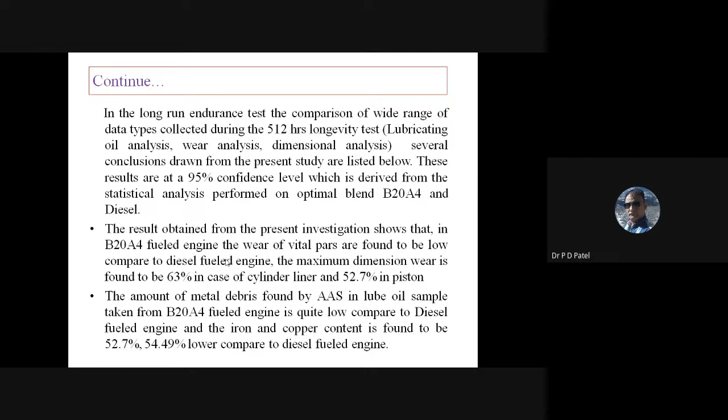The largest particle available in diesel is very high compared with B20A4. Again, these are every 128 hours. So at the end of this whole experimentation of qualitative and quantitative analysis, we concluded that with B20A4 fuel, the wear of vital parts is found to be low compared to diesel fuel, and the maximum reduction is found to be 63% in the cylinder liner and 52.7% in the piston assembly. So we concluded that in B20A4 the percentage of wear is less compared with diesel fuel.

This article has been published in Fuel, by Elsevier: Tribological assessment in a biodiesel diethyl ether fuelled compression ignition engine. And lastly, in the same part, we developed a regression model. As I said, we carried out vibration analysis with the FFT analyzer. The regression model was developed with respect to the predefined parameters of this engine and the wear analysis, and the predicted values and experimental values are almost near. This regression model is available in the article, which is open source.

For the scope of work, this is one model and one experiment we have developed. But if you go for research work, you can change the optional fuel with an SI engine, with any biofuel, with or without additives, or by changing engine parameters. You take the nozzle spray pattern, identify the nozzle hole number and diameters, change the nozzles, identify the nozzle spray angles, because ultimately you have to promote better combustion. Our goal is normal, better combustion, so that emissions will be reduced and performance will be better. You can go further with the nozzle spray pattern by changing the optimization technique.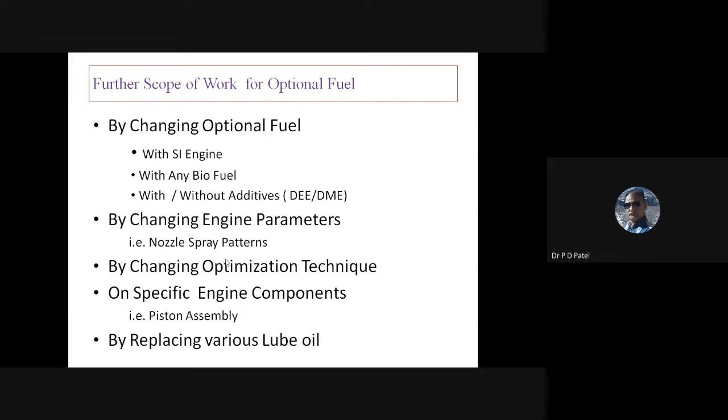You can change the optimization technique. You can go with a specific engine component, like the piston assembly. And lastly, you can keep the engine and the fuel the same, replace the whole lube oil, and check it. You experiment on the lubricating oil itself and go with life cycle analysis for changing the lubricating oil, so you'll get better results. These are all areas where you can go for further research.